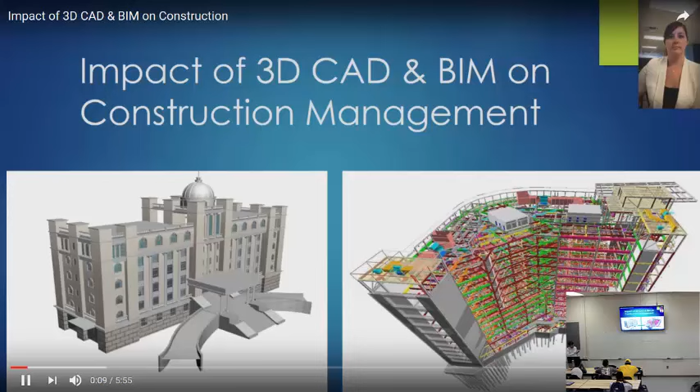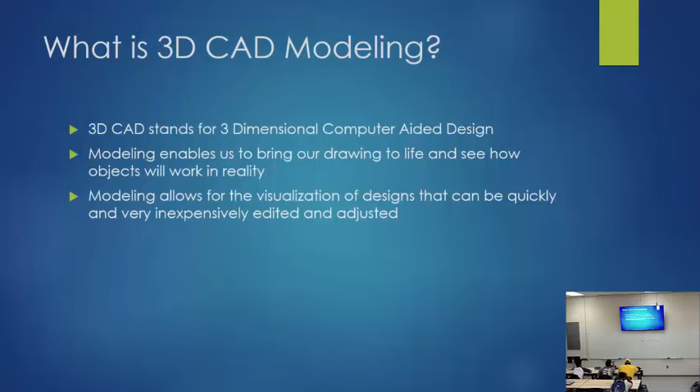Hello, I'm Nancy, and I will be representing our topic: the impact of 3D CAD in construction management. What is 3D CAD modeling? 3D CAD modeling stands for three-dimensional computer-aided design. Modeling enables us to bring our drawings to life and see how objects will work in reality. Modeling allows for the visualization of designs that can be quickly and very inexpensively edited and adjusted. Here's an example of an element modeled within 3D CAD.

So what is BIM? BIM stands for Building Information Modeling. Autodesk defines BIM as an intelligent 3D model-based process that equips architecture, engineering, and construction professionals with insight and tools to more efficiently plan, design, construct, and manage buildings and infrastructures. BIM not only contains architectural information, but also includes information regarding electrical systems, HVAC, plumbing, fire protection, structural, and civil. All in all, BIM is a one-stop shop for all the information regarding construction.

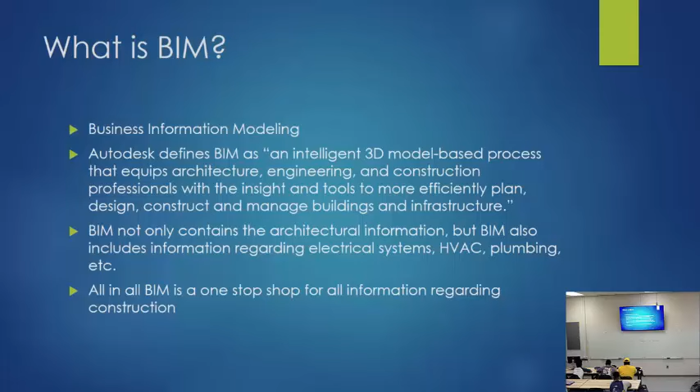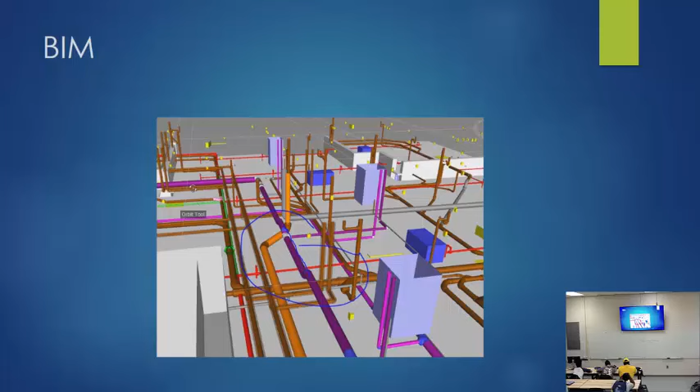Here's an example of a BIM clash detection model. This model contains models for each discipline: architectural, structural, fire protection, mechanical, electrical, and plumbing. In this example, we see clashes between fire protection and plumbing. Each discipline would then get together and come up with a solution to clear the clash. This is all done within a 3D model, which will help alleviate issues during the construction process.

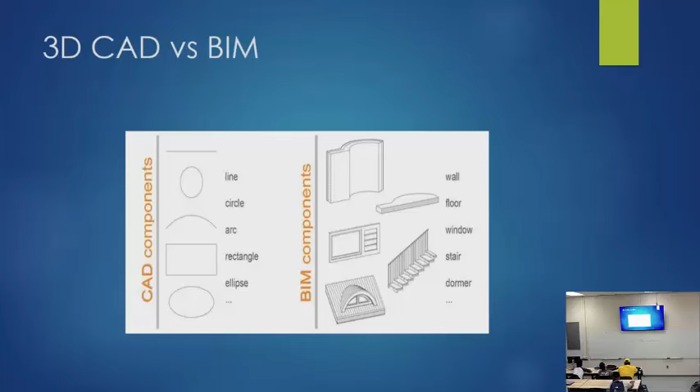Here are examples of 3D CAD components versus BIM components. 3D CAD components are called blocks. These can be very basic or very detailed components. On the right, you have the BIM components, which are families. Families can also be very detailed or basic, but can provide more in-depth detail when it comes to construction, what materials are being used, and how the material will last throughout the construction process and the life of the building.

Here are examples of 3D CAD plans versus BIM plans. CAD plans are normally plan views and elevations of a building, whereas BIM plans can be made up of 3D models, 3D section views, and different angles of the building.

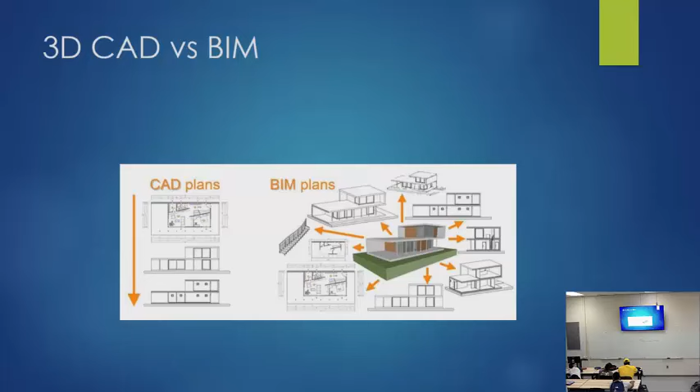Benefits of BIM over 3D CAD modeling include increased productivity, visualizations, simulations, quick changes, best possible designs, most cost-effective design. Let's discuss those now.

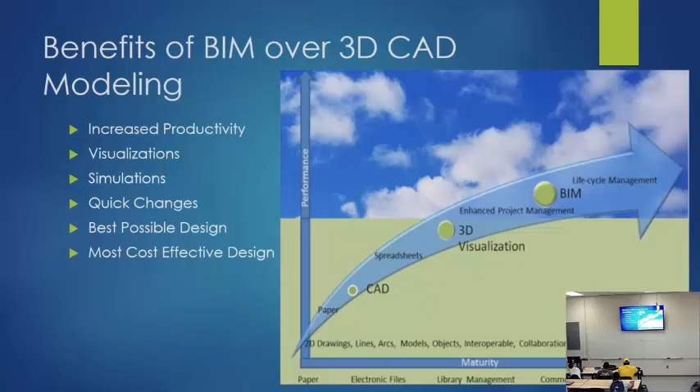Increased productivity. BIM allows for more automation. Making a change in one central place will automatically make changes everywhere. This decreases time needed for project edits and also helps decrease possibilities for mistakes.

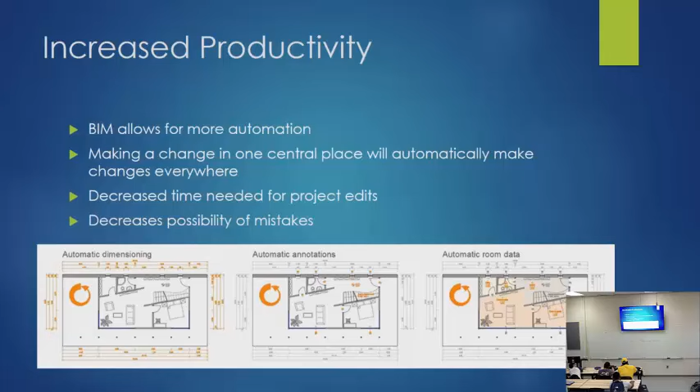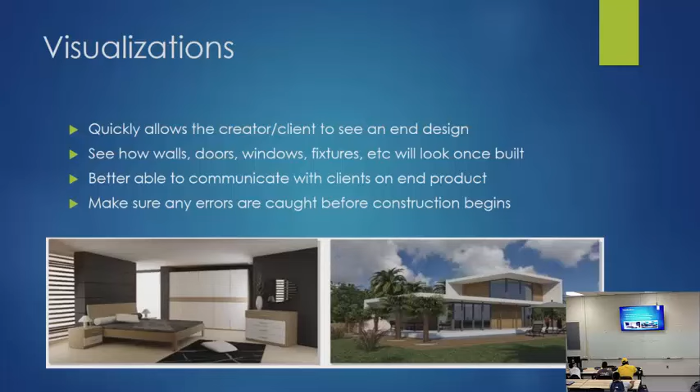Visualizations quickly allow the creator and client to see an end design, see how walls, doors, windows, fixtures, etc. will look once built. They can also use the exact materials to render a visualization for the client. They're better able to communicate with clients on the end product and make sure any errors are caught before construction begins.

Simulations are able to view how the building will react to different times of the day and different times of the year. See how the sun and weather can impact energy efficiency. They can see how shadows may impact the comfort of the people using the building and ensure the best possible construction dimensioning for cost effectiveness.

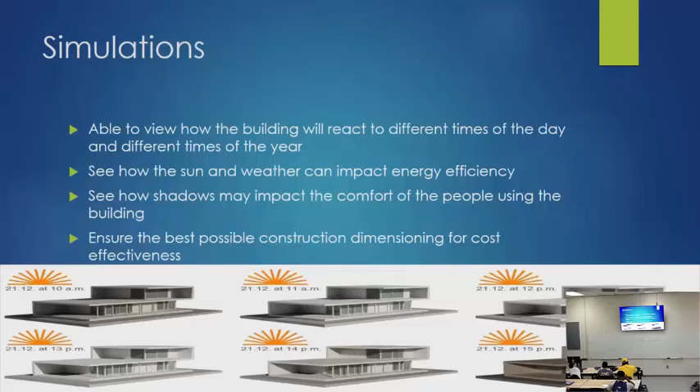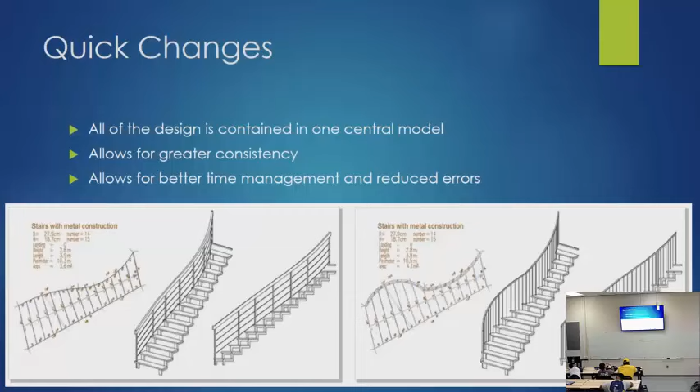Quick changes can all be done in the central model, which allows for greater consistency and allows for better time management and reduces error. If it's fixed in one view, it's fixed in all. The best possible design: because of the central design, it is easy to quickly make changes to see the impacts. We can try out many construction possibilities with little to no cost.

Increased options can be easily presented to the client.

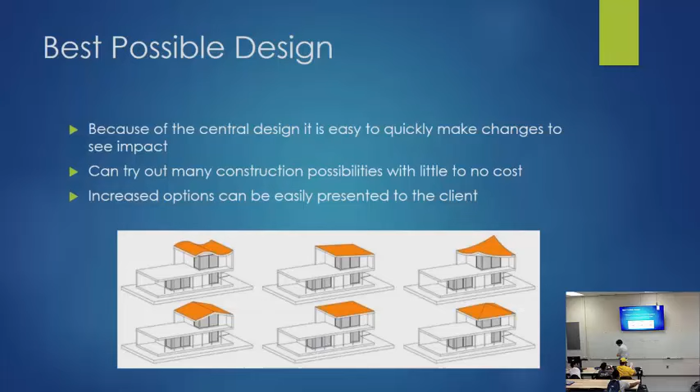Most cost-effective design: the bulk of the savings comes from operating a building over many decades. The designer can test different types of energy-saving methods before construction. How does airflow impact comfort? What windows provide the best insulation? And how do the building materials impact the temperature inside the building?

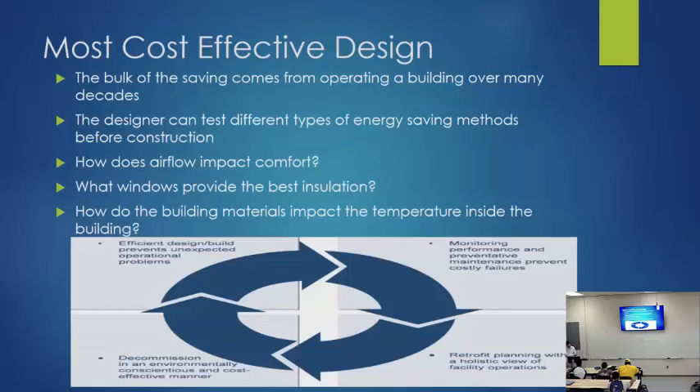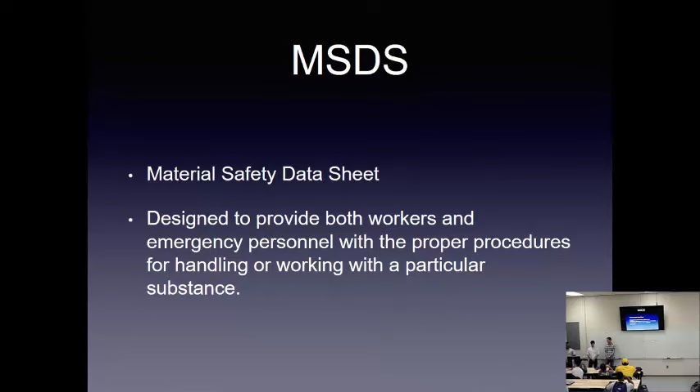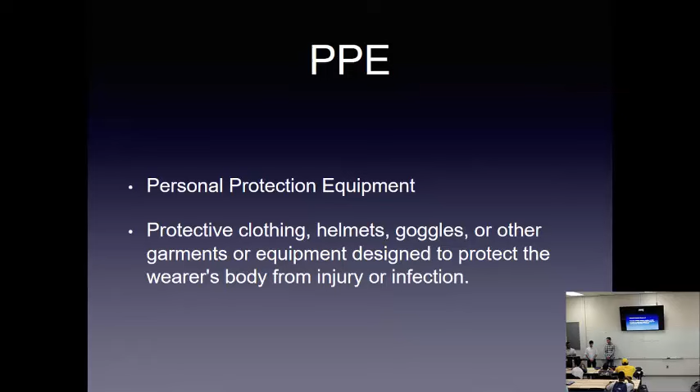A chain is only as strong as its weakest link, just like a house is only as strong as its weakest beam. That is why we have building codes. Building codes pretty much ensure that builders aren't trying to take the cheap way out and build a house really fast and have it be unsafe. These codes go down to the spacing between the nails, it gets very specific.

Two major things they take into consideration when making these codes are vertical and shear forces. Vertical force is the force that the house puts down on itself with its own weight. Say you have a brace holding up the roof in the attic, and they don't follow code and don't put enough, and the roof is too heavy, it breaks the braces and then it collapses.

Then you also have shear force, and it's pretty much the same thing except it's a force pushing sideways. So say you have the rafter going down connecting to the joist, and the weight of the roof pushes it down, forcing it out, and then again the roof collapses.

The IBC, the International Building Code, was created by the ICC in 1994, so that we will have the building standards that we have today.

These are updated every 3 years, which puts contractors in a struggle sometimes because it's getting so specific and so hard for them to keep up. It is the responsibility of the City Building and Safety Division to keep these contractors, engineers, and building inspectors up to date on these new codes.

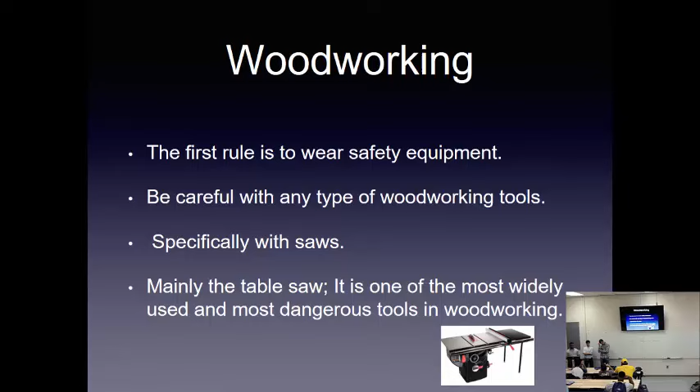The table saw is not deadly, but it's one of the most dangerous because it's the most widely used saw in woodworking. Here are a few safety tips to keep from hurting yourself.

You should change the blades on a regular basis, mainly so you don't want them to get dull. If they get dull, the wood might kick back or the blade might break off. You want to use sharp blade bits for that reason also.

Never reach over a blade while cutting, and you want to disconnect all power when changing blades because you don't want to cut yourself. Basically, that.

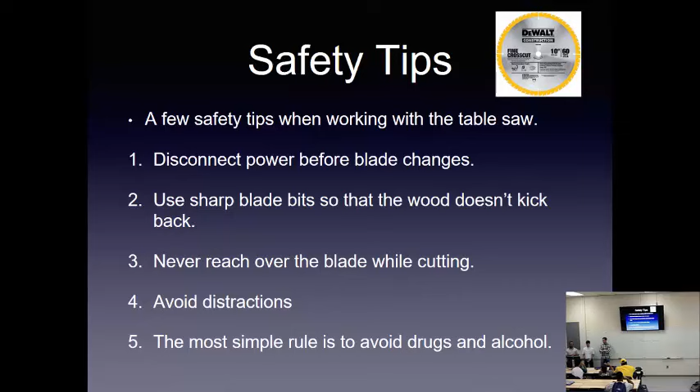Most simple rule: you want to avoid drugs and alcohol, because if you come in impaired and you hurt yourself, your employer won't be liable. Be careful when installing anything.

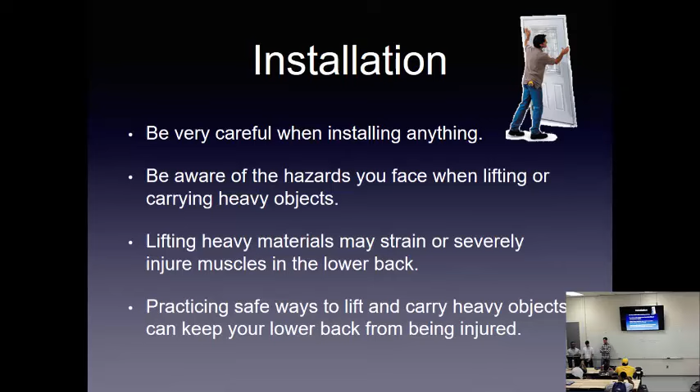Be aware of hazards when lifting or carrying anything. Use other PPE like back belts or straps to carry any heavy equipment.

When carrying heavy loads, some people like to stretch before lifting to keep from pulling muscles or straining the back muscles. And if anybody lifts weights, they know: lift with your legs, not with your back.